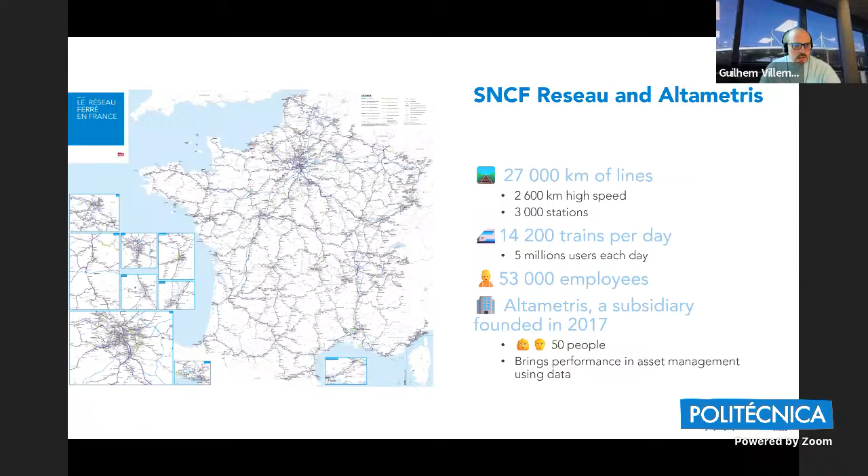That being said, we have 4 key services and data expertise in railway. We deliver software, SaaS software for processing data, visualization at large scale, and we'll dig deeper into that large scale problem afterwards. We have some solutions for data acquisition, data collection, so we can do data collection and we can teach people and give them drones and stuff, so they can do that with more agility. We have a dedicated part of the company which is dedicated to topography and inspection support for railway industries, using the software I just presented. And then we have the R&D expertise consulting part that covers the two scopes I just mentioned.

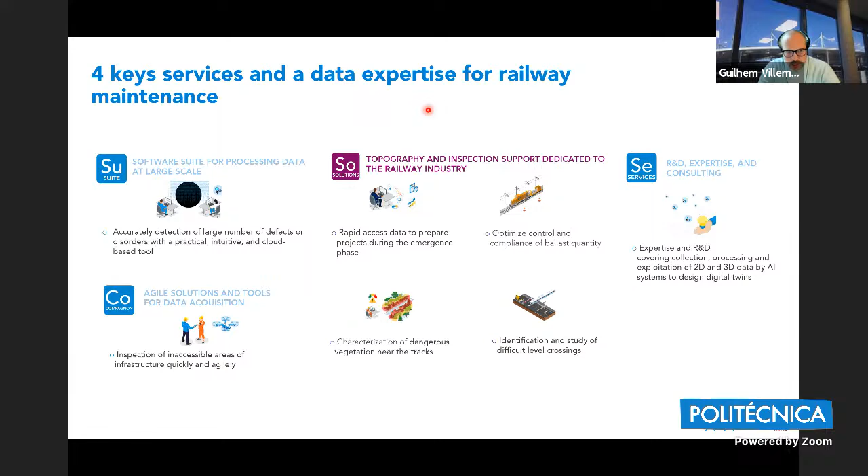But the main thing I want to speak about today is the digitization of the railway network. So why would Réseau, why would a railway infrastructure manager like to digitize its own network? Well, first, you might want to have accurate measurements of your infrastructure.

So with 3D point clouds, you can have precise measurements of your infrastructure that you can take directly from the data, like track gauge, alignment, elevation, which are all critical for ensuring safe and efficient operation of the railway.

You might also want detailed visualization. With 3D point clouds, you get a highly detailed and accurate representation of the railway infrastructure. This allows maintenance teams to visualize the environment, tracks, overhead wires, surrounding structures with great detail without having to go to the place on foot, where sometimes it's difficult to access a precise location.

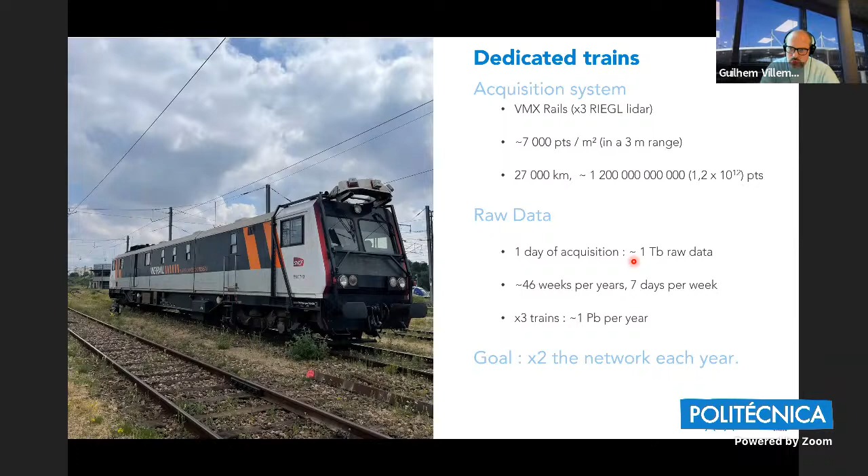And I'll present in the next slide the processing chain that we have. I'm sorry, this one is in French because I didn't have time to translate it into English, but I'll make the translation for you. So you have, I told, the acquisition ways.

The idea is you have the ESV, Engins de surveillance de la voie, here, but there are also two other vehicles that can scan the network. So it's actually 3 trains that can digitalize the network in France. You can bring also other trains into the process, because the factory that we put in place is able to cope with that. You can have also data coming from other sources like airborne LiDAR taken from helicopters.

The first part is to make the acquisition, so that's either railway-borne or airborne, and then transfer all that raw data into the cloud. Part of the processing is done in a common core automatically, while other parts are done on demand. So you have all that assembling the raw data, rails extraction, some quality checks, trajectory processing and stuff.

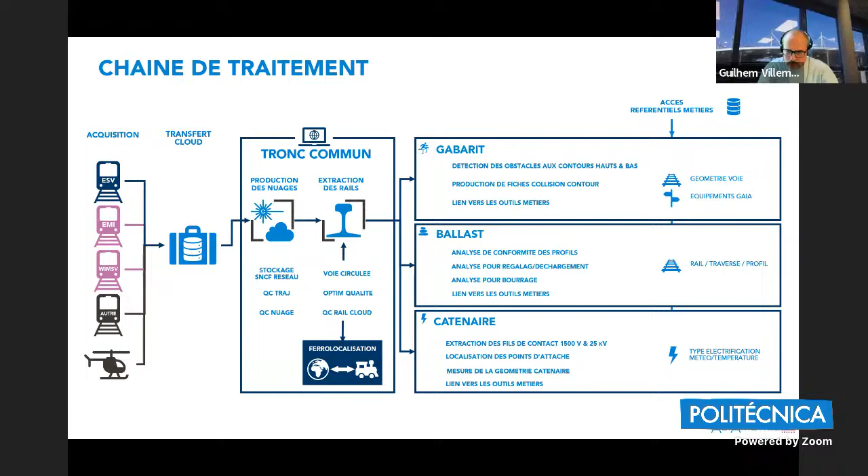So we have point clouds. As I told earlier, 3D data like point clouds allows for a comprehensive analysis of the railway infrastructures. We can capture detailed information, track geometry, curves, elevation changes, so we can assess the overall condition of the railway.

But there are challenges that the cloud can cope with. Data volume: I said 1 terabyte of raw data per acquisition day. When it's processed it's way less, but still a lot, since we want a lot of information about the tracks. Processing very large and very dense massive point clouds, data volume is one of the biggest challenges, but it's easily coped with.

You also have the problem of computational load. Dense point clouds demand high computational power for processing if you want to do filtering, segmentation, and overall analysis. For algorithm complexity, algorithms that work well on smaller datasets may not scale efficiently to handle massive point clouds. So optimizing algorithms for performance and scalability is a significant challenge as well.

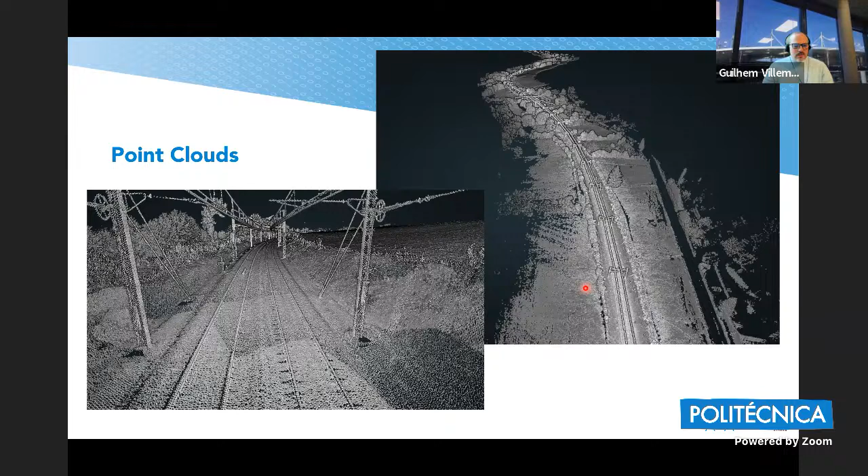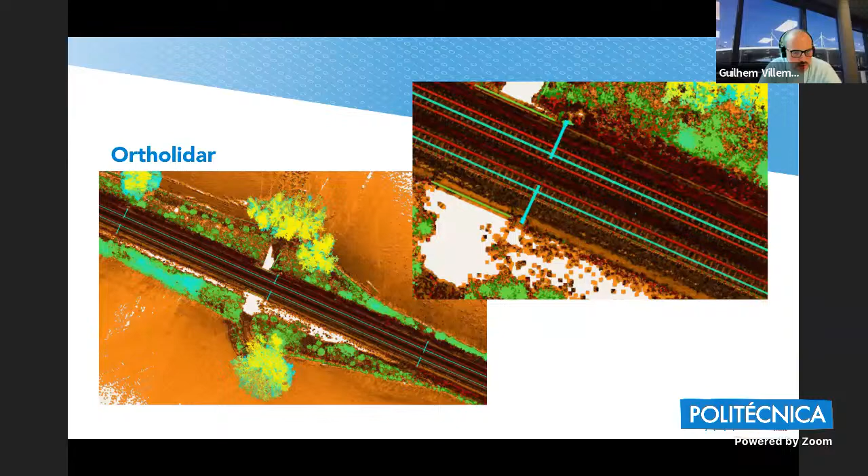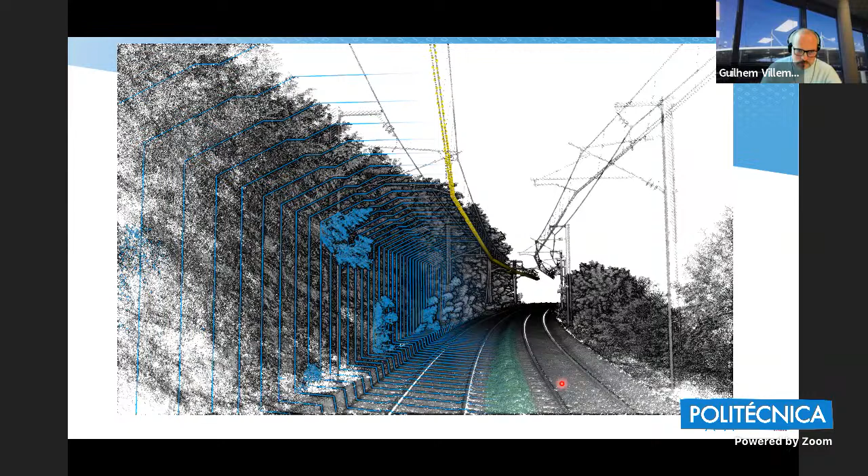So here's an illustration of the applications and processing we do on that data. We have a condensed view of 3 applications that I'll give more details about afterwards: gauging, ballast compliance, and overhead catenary geometry. Gauging is part of the blue gauges you can see there, ballast compliance in green, and overhead catenaries, the geometry of that. Those are the main 3 applications in production today in our software tools.

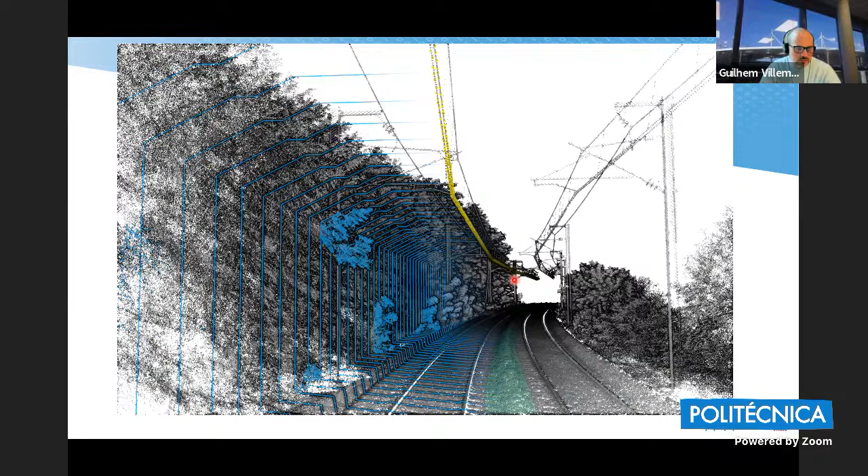It all begins with rail measurements that we have to extract from the point clouds. That's the beginning of common core processing, and then gauging is done on demand.

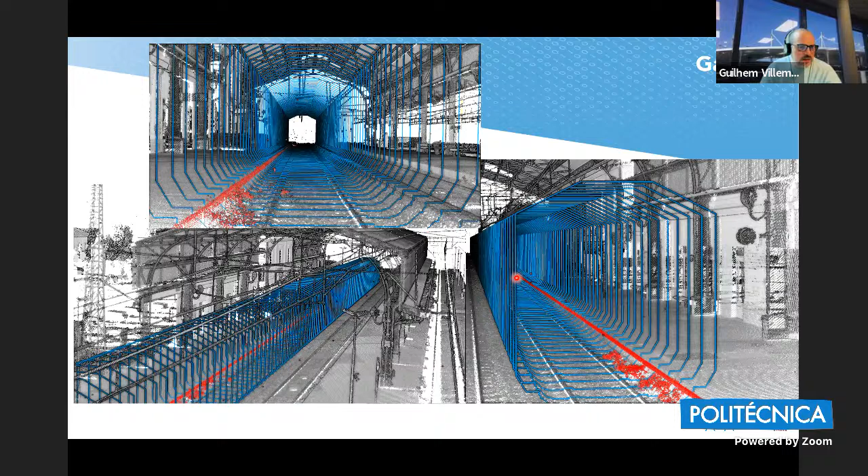The idea of gauging is that if you want safety on tracks, you have to detect obstacles and identify where the infrastructure can be problematic for the circulation of trains. So the idea is to detect what points are inside the clearance gauges.

In this example, there's a platform that's in the gauge, and also some vegetation, but the most problematic obstacle here is the platform. We want to be able to say there's an obstacle here, but this obstacle is not just a collection of points whose nature we have to determine, it's related to some asset we can identify in the infrastructure database of the maintainers.

Typically we're able to do clusterization and say this obstacle is the same object, not a collection of objects, and relate them to one another and say this is a long obstacle which is a platform, and give the ID of that platform in the Réseau modelization of its infrastructure.

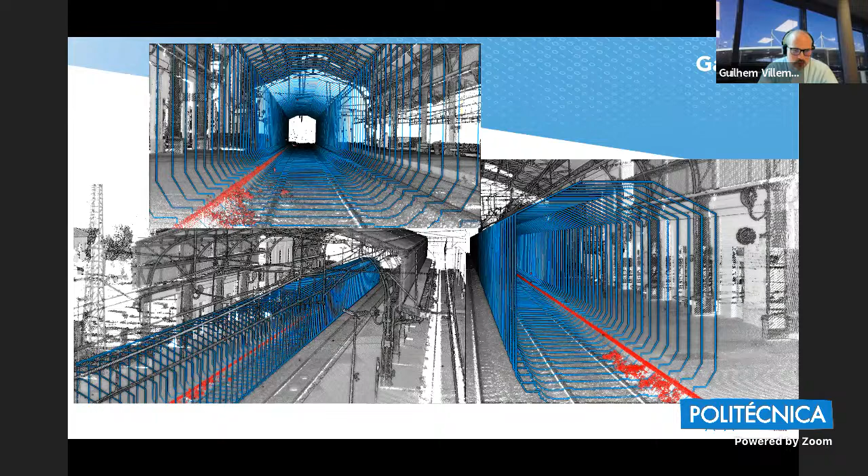Frequent measurement of catenary geometry is vital for maintaining electrical contact, preventing wear and tear of the catenary itself, and ensuring safety by complying with standards that exist for the maintainer — the catenary needs to be in a certain position given the geometry of the tracks underneath. It also enables predictive maintenance, because if we can compare the geometry of the catenary over time, we can say there's something happening at a specific position, and maintenance teams can schedule exactly what they need to do at that precise location.

It's interesting to note that before, measurements were made by specific engines running at like 3 kilometers per hour. Imagine how long it would take to measure the entire network of 20,000 kilometers with 2 or 3 engines running at 3 kilometers per hour, and being able to insert them into traffic meant you could only measure at night, with about 8 hours with no traffic, so you couldn't cover that many kilometers each year.

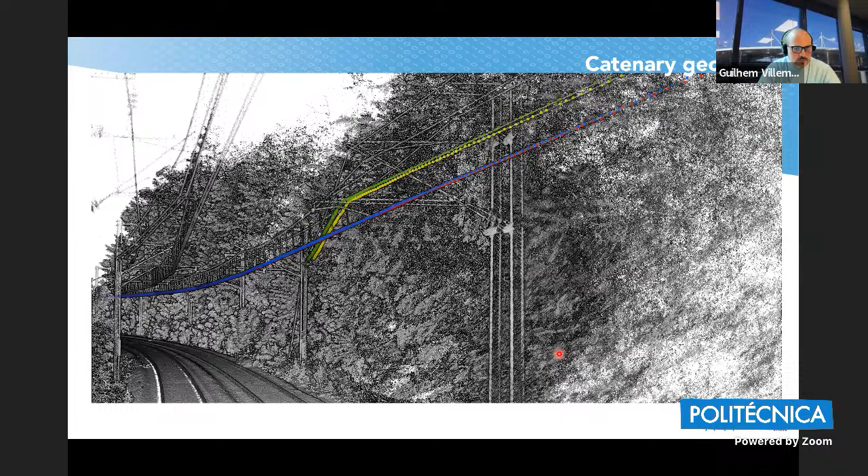Third application is ballast filling compliance. Properly maintaining the ballast ensures that the track remains in the correct position, even under the heavy loads exerted by passing trains.

So having the right amount of ballast under and near the tracks is really vital. It takes about 2 tons of ballast per meter. When you need to put more ballast, you have to carry it to the right place, and you also have to extract that matter from quarries. It has a big environmental impact, extracting ballast and moving it from one place to another, and being able to know how much ballast you have at a given place, and if it's in compliance with the norms.

It's really good information, because you can say, oh, there's too much ballast at that position, we'll remove it, and there's not enough a kilometer ahead, so we can take what's been removed and put it back in the right place to ensure the filling of the ballast for the tracks.

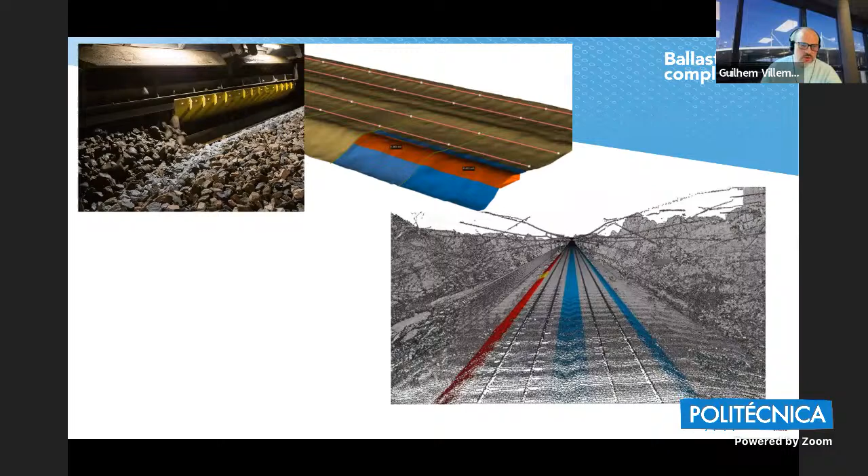So far, this is all in production. It started about 2 years ago, and as of this year we've already processed and stored about 75,000 kilometers of tracks. That's like 3 times the network if you remove the high-speed network. It's really more than we expected, and we are working on putting more use cases and getting more information from that data.

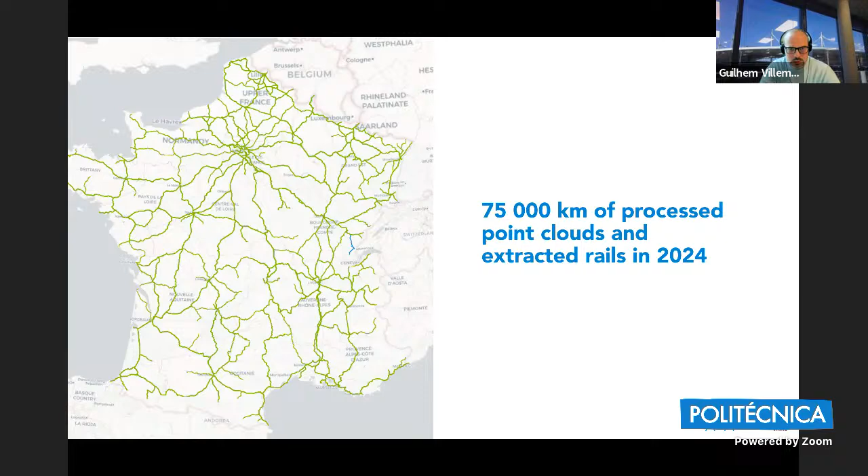By assessing the vegetation hazard using AI. We didn't speak about segmentation, AI and stuff on point clouds, because as they are very dense, very large and very specific, it's really a big challenge to come up with an algorithm that gives the results we want and being able to make the analysis we need.

But by segmenting the point clouds, different elements such as trees, shrubs, and other vegetation can be identified and separated from the railway infrastructure. This allows precise monitoring of vegetation, its growth, encroachment, and it enables detection of vegetation that poses a risk to operations—trees too close to the track, branches that could interfere with overhead lines. So you can assess the hazard more efficiently, and as always, the maintenance team can go to the right place at the right moment to make the right operation.

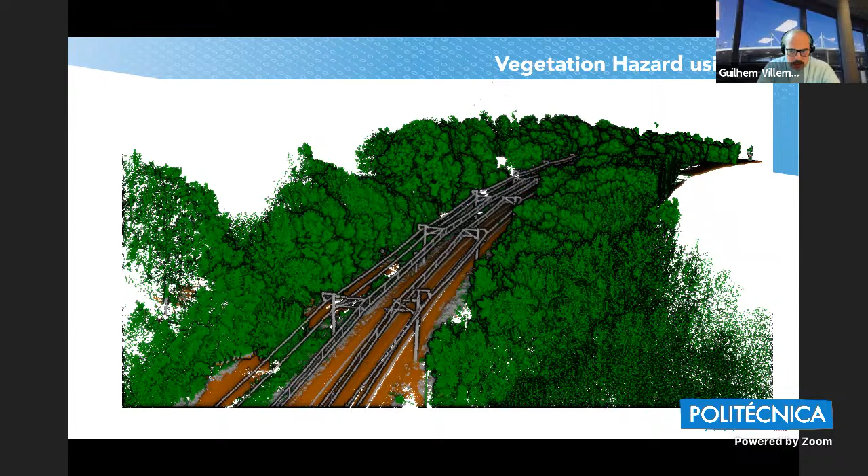There are some cases of danger regarding where the vegetation is relative to the tracks, depending on how the soil is—if you have cuttings or embankments. So the risk is higher for a tree that's high up there than a tall tree that would be lower from the track. So you have classes of danger, and we can assess that danger given the position of the trees.

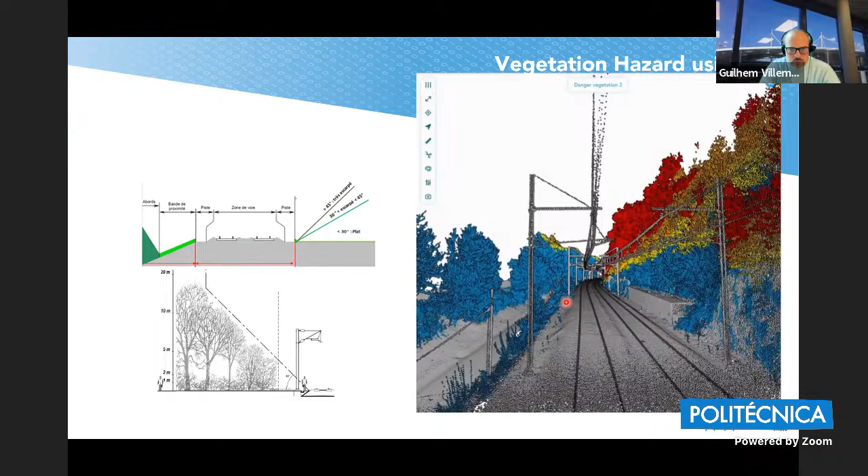You can also combine 3D point cloud data with 2D images of railways to enhance object detection and analysis, because they are complementary. You have spatial information about the environment with 3D data, and with 2D images you have detailed visual information, color, textures, and you can improve the accuracy of your 3D information using 2D. You have more context, and there are some objects that can be difficult to detect using only 3D, and 2D can help you detect those objects.

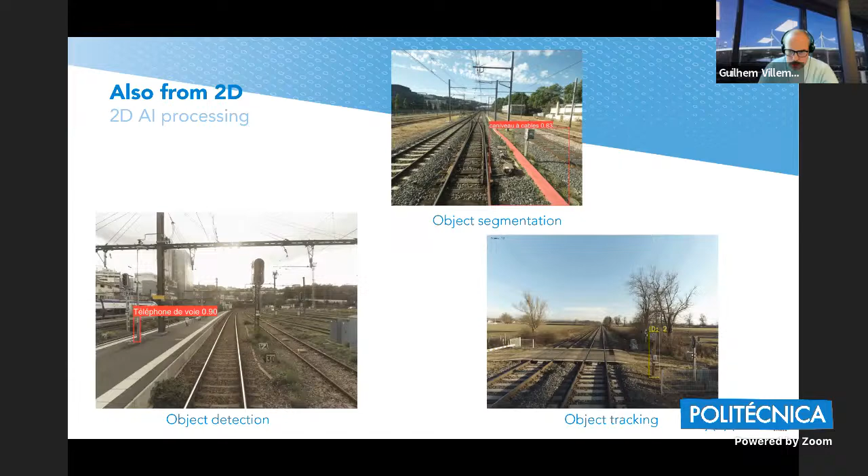Then you can also combine 2D methods of detection with 3D data. You can make specific views of your point clouds to have a representation of them from top, or from any perspective you want. So you can make artificial images that can then be processed by 2D algorithms that are very good at that, rather than 3D AI algorithms that are more in development and maybe not as robust as 2D CNNs and such can be.

Okay, and then with all that, you can think of initiating some BIM—building information modeling—of the railway network. This is very challenging, because we are not dealing with a new project, but with existing, diverse, complex infrastructure that's been in place for many years, even centuries, and you need to start that on the right foot. You can do it using information extracted from 3D and 2D images, as I presented.

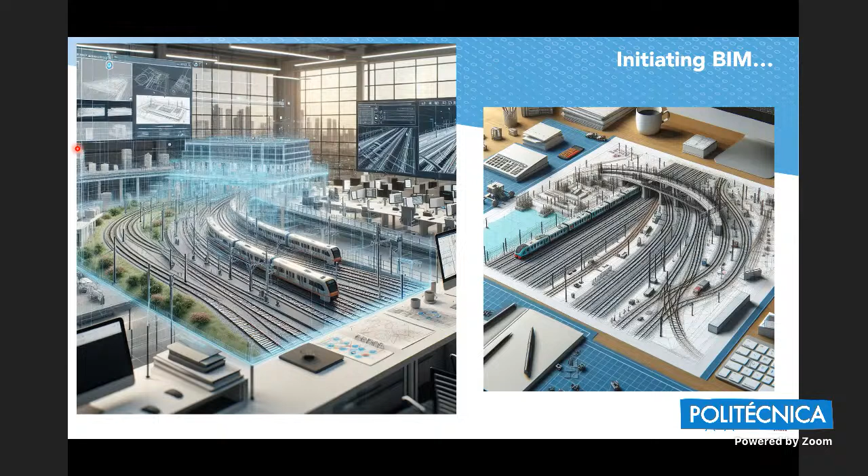So one of the biggest challenges is the complexity of existing infrastructures. Railway networks consist of various elements, different materials, conditions, ages, and modeling this diversity accurately is very challenging, because you need algorithms able to handle all that, and building algorithms that can cope with a lot of complexity takes a lot of time to develop.

You also have to imagine that some features or elements are hidden—underground cables, buried tracks—you may not be able to access or even see them. So it's even more complicated to collect the right data and do the right processing when features are hidden, like cables that are buried underground.

We talked about that when I spoke about clouds, but you have data volume management issues, because you have large data sets, high resolution images, and a lot of data coming out of that. It requires significant storage and processing capability, so you have to come up with solutions that can cope with that. Integrating all that information, diverse data types, and maintaining the integrity of all that data throughout the process is also a complex task, over time as well.